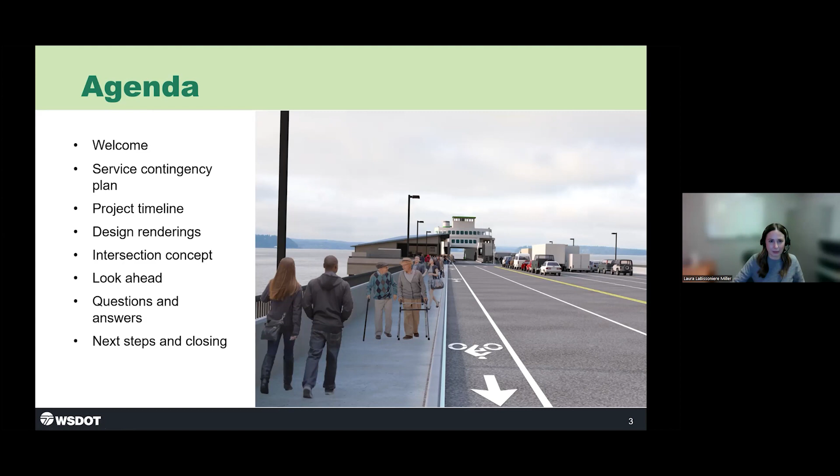Before I launch into this project timeline, just a note of something that provides a little context to this project. Last month, Washington State Ferries released its service contingency plan, which is an update of a plan we've been following since COVID that outlines some of the constraints the ferry system is facing preventing us from restoring full ferry service system-wide.

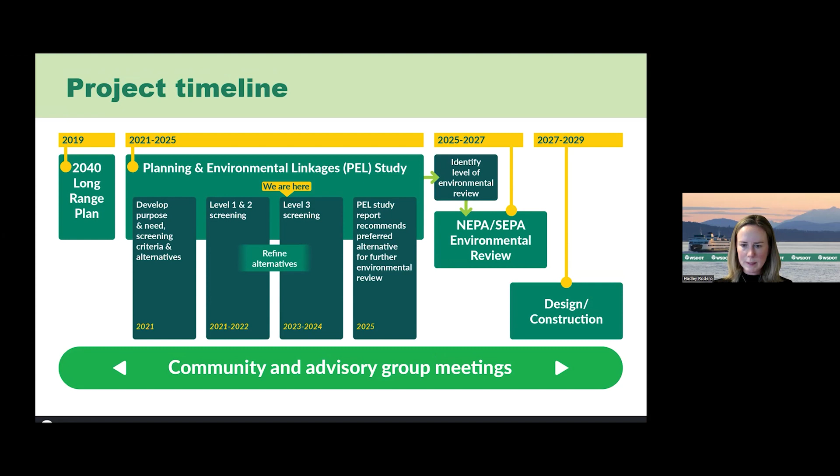One of the routes that hasn't been fully restored is the Fauntleroy Vashon Southworth route. It's been running on 2-boat service instead of the full 3-boat service for a couple of years now. The plan, which I'll put in the chat in a minute and which we released publicly, shows that we're probably not going to restore full 3-boat service in the next several years, at least full time.

We'll be adding a 3rd boat to the route as often as we have the crew and vessels available to do so. So it's just a little context for this project, that the Vashon community in particular and Southworth customers are really feeling a lot of operational constraints and have had reduced service for a couple of years, and they've been focused on working with us on how to make the best use of that 2-boat service.

And deal with the operational impacts of that, which is preventing them, understandably, from fully engaging in this project, and means we don't have a way of looking at the terminal operating as it's intended to with consistent 3 144-car ferries. So it's just something to be aware of, and you may hear from community members and constituents about this as we move forward with the process, as that's happening in the background.

But let's jump back into this project. The slide on the screen shows the timeline. We're still in the planning and environmental linkages phase of the project, the PEL study. We're in the level 3 screening process.

When we met last fall, we shared the refined set of alternatives that we're focused on right now, and we're now working through doing the analysis in several different areas that will allow us to screen that set of alternatives down to a preferred alternative that will then carry forward for further environmental review under NEPA and SEPA.

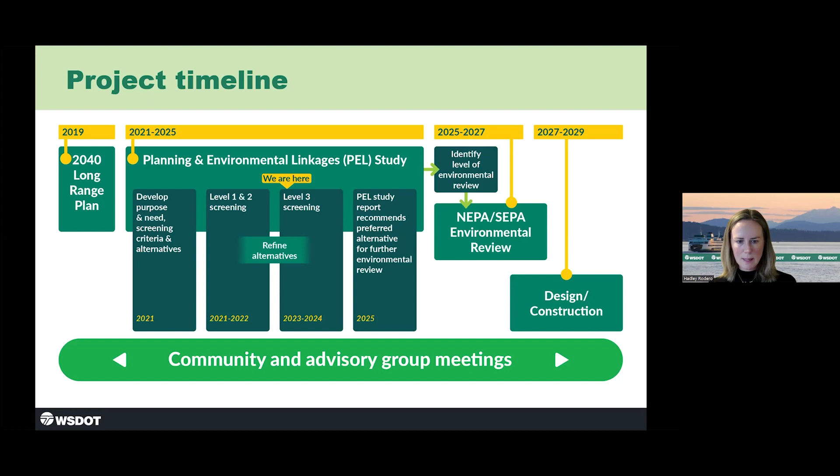This is another graphic representation of the process. We did level 1 and level 2 screening over the last several years that narrowed us into the existing dock location in Fauntleroy, with one alternative roughly the same size as the dock we have today, and alternatives that are larger than what we have today. That was the outcome of level 2 screening.

We then further refined those 2 general alternatives into a set of alternatives with different size docks and different footprints. We're at the process now where we're going to begin evaluating those refined alternatives before selecting the preferred alternative at the end of PEL. So before we move forward, any questions on the process or where we're at, or what we're looking to do today?

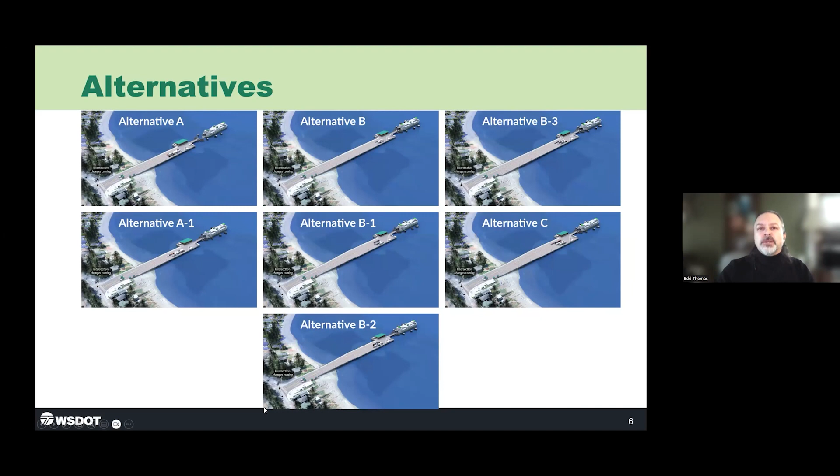So at our last meeting, we discussed the alternative summary, which sets the foundation for how we are evaluating the alternatives. I'd like to start by running through the alternatives graphics that we shared during the last meeting.

Starting with alternative A, it replaces the dock at a similar size as the current dock and maintains the existing wing walls and dolphins. This alternative has 4 holding lanes, holds 76 vehicles on the dock, and is 85 feet wide, about 18 feet wider than the existing dock.

Next are alternatives A1, A2, and A3. These are nearly the same size as alternative A, except they are approximately 40 feet longer than the existing dock and include new wing walls and dolphins. These options have 4 holding lanes, hold 84 vehicles on the dock, and are 85 feet wide.

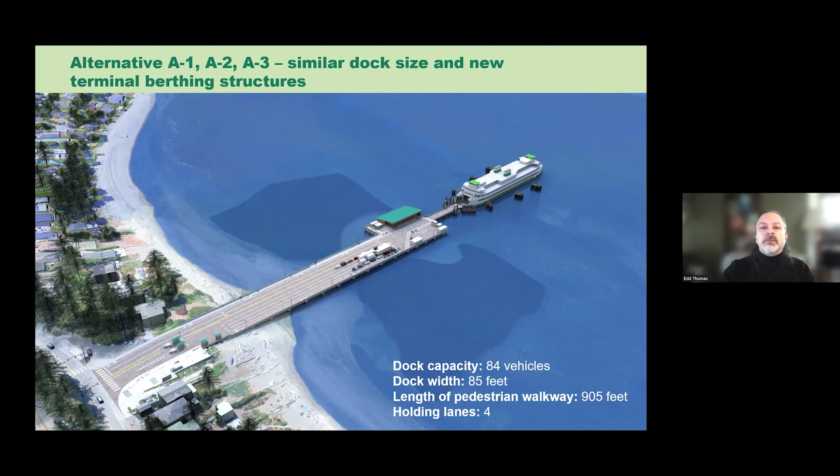Alternative B is a longer dock, and it lengthens the dock by about 240 feet more than existing. This option has 4 holding lanes, holds 124 vehicles, and is 85 feet wide also.

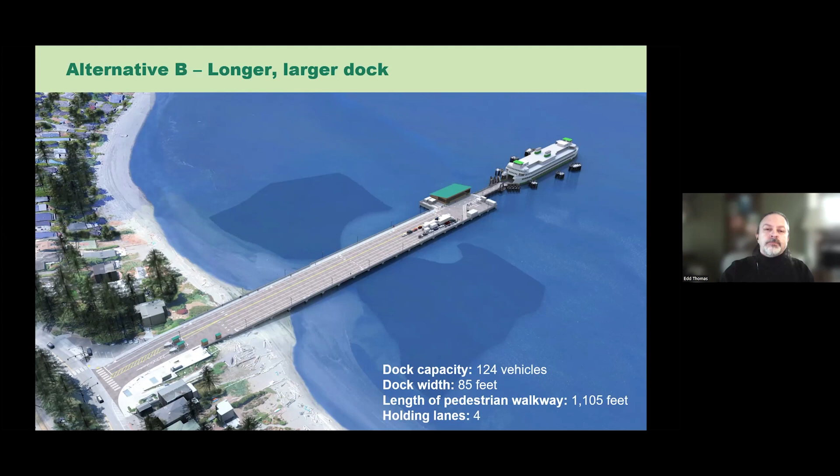Alternative B1 is also a longer dock. It's similar to alternative B, but has an added vehicle holding lane to the north. B1 holds 155 vehicles on the dock, is 94 feet wide, and this is the largest widening that we have on the north side of the dock.

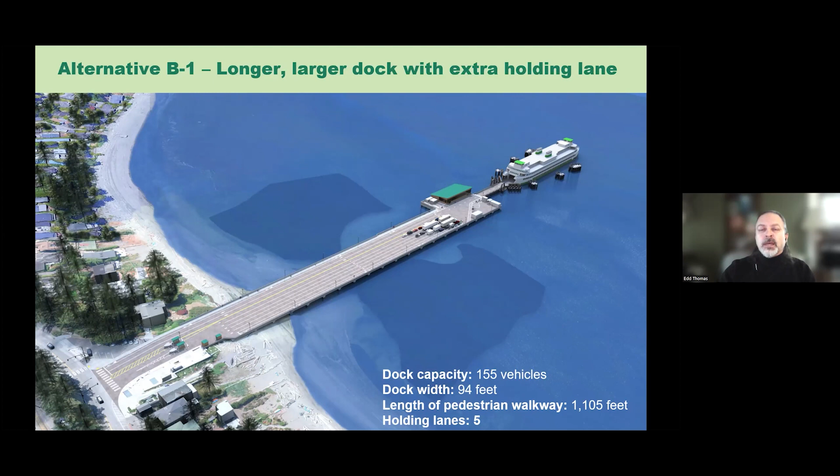Alternative B2 is approximately 250 feet longer and 36 feet wider than the existing dock. This option has 4 holding lanes and adds 2 shorter holding lanes to the south, further out over water. At its widest point, B2 is 103 feet wide, but near shore the dock narrows to 76.5 feet wide. This alternative holds 155 vehicles on the dock.

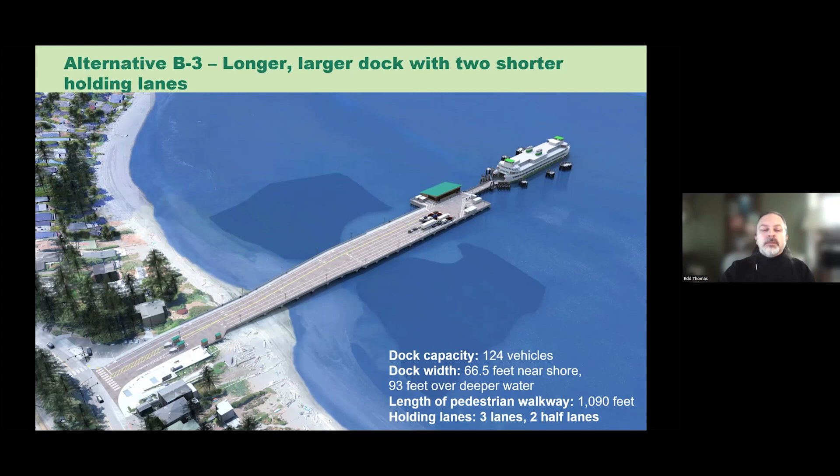Alternative B3 is the same configuration as B2, but has 1 less holding lane on the north side and is slightly shorter than B2. This option is 66.5 feet wide near the shore and 93 feet wide out over deeper water, and holds 124 vehicles on the dock.

Alternative C, again, is the same configuration as B2, but has an added holding lane on the north side. It's 240 feet longer than the existing dock. It's 85.5 feet wide near shore and 112 feet wide over deeper water, and holds 186 vehicles on the dock.

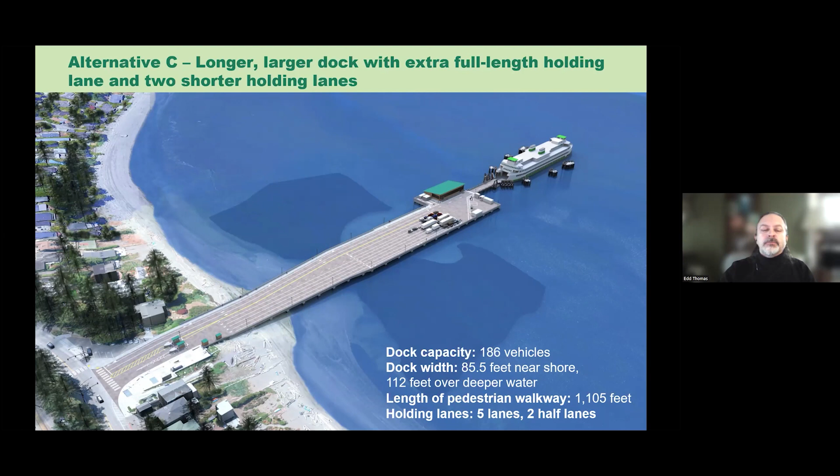Now, moving on, since our last meeting we've developed design renderings to help better visualize the differences between each alternative. These show conceptual finishes based on Washington State Ferry's new Mukilteo terminal. The intent of these renderings is to show the dock footprint and general layout for each alternative, and we will seek community input on the look and feel of the terminal later in the design process.

This first view is taken from the King County Pump Station and helps show what each dock option looks like next to Cove Park. The next three slides for A, A1, and B will show an approximate 13-foot widening to the north. Alternative B1 shows an approximate 22-foot widening to the north.

Alternative B2 shows an approximate 5-foot widening to the north. Alternative B3 is narrower, and it's actually narrower than the existing dock on the north side. Then alternative C again shows an approximate 13-foot widening to the north.

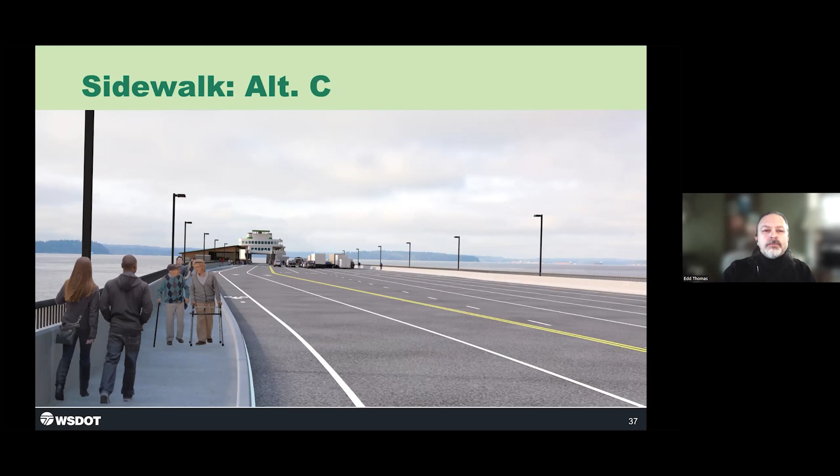Okay, this final view is from Captain's Park, and this offers a good perspective to visualize the differences between each alternative configuration. These first three, alternative A, A1, and B, are the same configuration, 4 holding lanes, and they have a dedicated motorcycle and dedicated bicycle lane. They're on the north. Alternative B1 adds the 5th holding lane there on the north side.

And then these next series show the actual partial holding lanes that are added to the south. On the north side, for the first length of trestle, you'll notice that there's a shared motorcycle bicycle lane, and out over deeper water, it widens into a dedicated separate motorcycle and bicycle lane.

Okay, with that, I'll hand it over to Laura. Thanks, Ed. Okay, just pausing to see if there are any clarifying questions about any of the graphics, if anyone has any questions or comments, and we can certainly go back as well to review any of the images that we just showed.

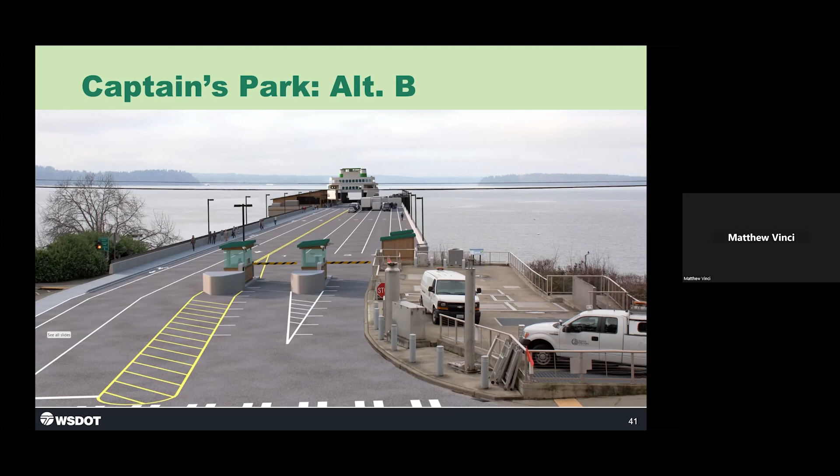Yeah, there's not really any new space for vehicles or emergency vehicles. But the priority loading WAC would still apply, so your vehicles still have priority loading status returning to the island, so they would get on the boat. How they get there, I guess, is an operational decision that we'd make, right, Trevor? How you get them down to the front.

Correct. And when they finally get close to selecting the alternative, the operations team will sit down and plan operations on each design that you guys have, to see what works best for us. Perfect, thank you very much. I appreciate it. You bet. Thank you.

Any other questions or comments before we move on to the intersection? Rod? Yeah, I'm new to this whole process and all the background to it, but I was wondering, the ferries that use this terminal, where do they berth at nighttime?

Great question, let me answer that. So we basically berth two of them. Well, right now it's a two-boat schedule, so one will berth at night over at Vashon. And because we have a crew switchover, the other one will berth at Southworth. Ideally, all three of them would berth at Vashon overnight, but right now one berths at Southworth because of the early morning crew hours.

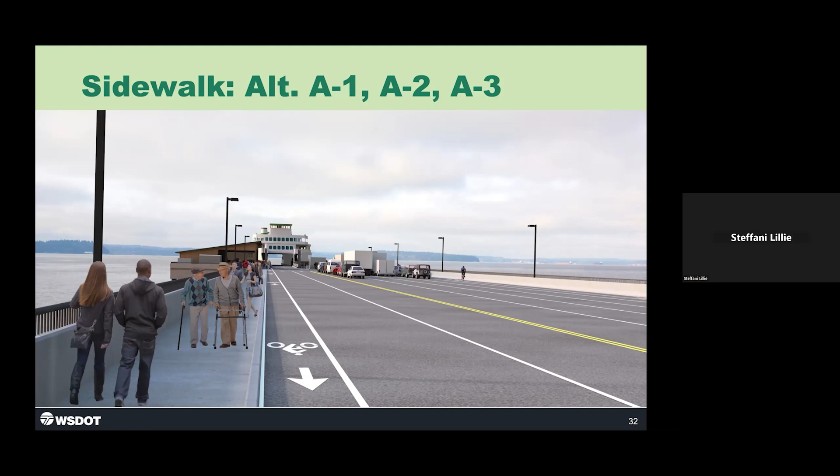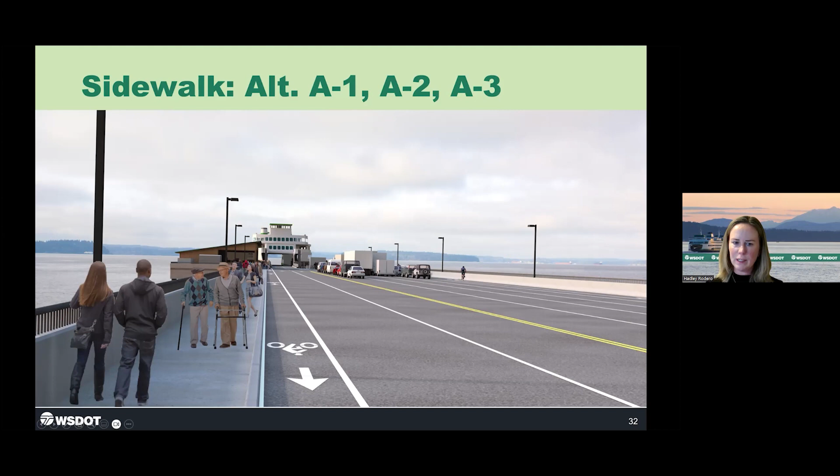No, I think that's great. The one thing I would highly recommend is maybe a portion of the way down, benches, just so that if you have somebody a little slower who needs to take breaks, you've got that built in. Yes, that's a great comment, Steffani. And back to Penny's question earlier, I forgot about this - this is another comment we've heard extensively through public outreach, that some of those docks, the B alternatives that go longer, they're concerned about the distance between the transit stop and the road and the end of the dock to get out to the terminal building, both from folks with mobility challenges, ADA perspective, but just in general.

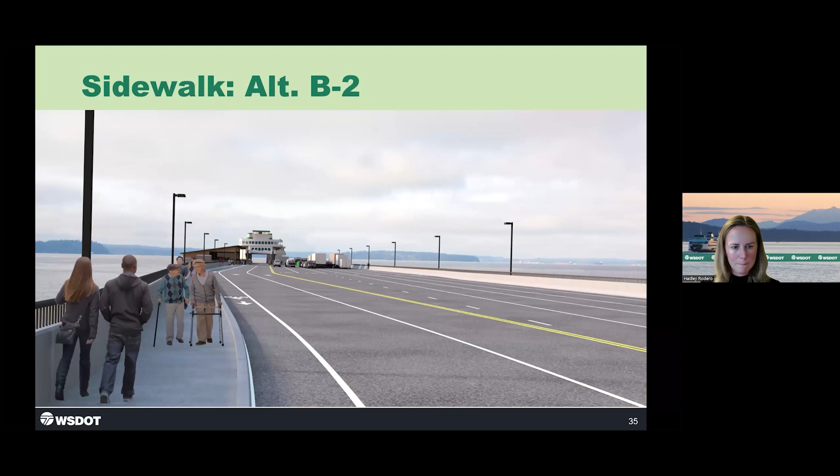Okay, I'm not seeing any other hands up, so we do have some additional time later for Q&A, but we'll go ahead and move on to the intersection. Dave, do you want to kick that off? Yeah sure, let me introduce the next part of the presentation, and that is the intersection at the head of the dock at Fauntleroy Way.

So a key part of our purpose and need statement, as we've talked about in previous meetings with you all, is just to improve our overall operational efficiency at the terminal. We've talked at length about the size of the dock being about two-thirds of the capacity of the boats. We've talked a little about pickup and drop off, staging for bikes and peds, and all of that. So within all of that, our goal is to make the terminal work more efficiently. One of the things we're looking at right now is how we could manage the intersection better, especially now that we've announced the Triangle Route will be on two-boat service for at least the next few years, if not longer.

In order for us to maintain our headways and process the vehicles off the boat, and as well to address the safety concerns that I think have been out there for many years, long before this project showed up, the idea of signalizing the intersection is taking root.

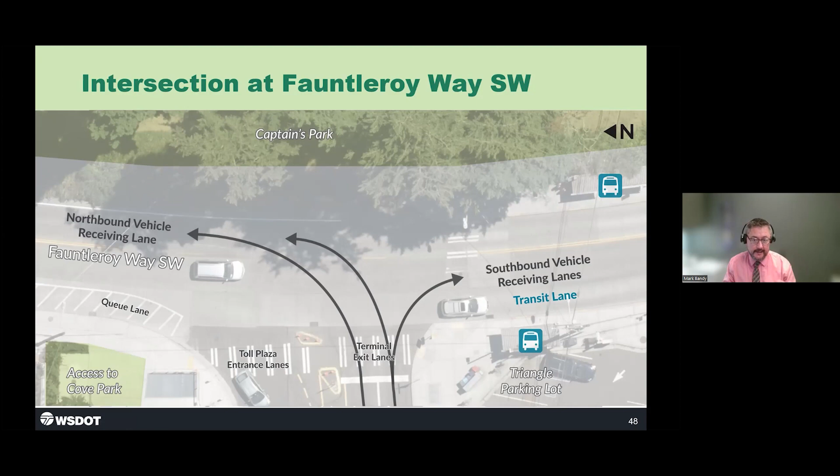Back to the conceptualized signal. What we're showing here is how the movements would come off the dock in the two black lines: left lane going left to go northbound, and the right lane going right to go southbound. We're also showing how the bike lane and pedestrian crossing movements would occur. Those we're thinking would be in their own phase to separate them from the vehicle movements coming off the terminal. And then Fauntleroy Way, of course, would be served as it is today.

Patterns to go to the ferry would be very similar to the situation today, where it's predominantly southbound on Fauntleroy Way during the busier times. The northbound left turn would be prohibited. In the case of a signal, we could do that with an electronic sign that can be turned on or off for lower volume times when that restriction doesn't need to be there.

A couple of features of the signal: we'd design it to have emergency vehicle preemption response, also support transit signal priority since the C Line runs along Fauntleroy Way here. And we'd also design it to have detection that can monitor when the ferry is arriving or not arriving, so you can time the signal to handle the different volumes that come off.

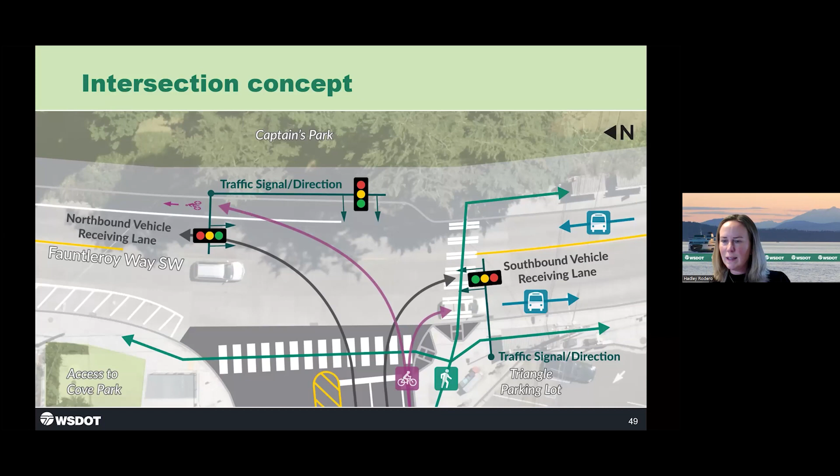Absolutely. I mean, we have a lot of questions for you too. So if you have questions for us, please shoot them over. We can't answer that because we're not in operations, but we can certainly find the right folks to answer those questions.

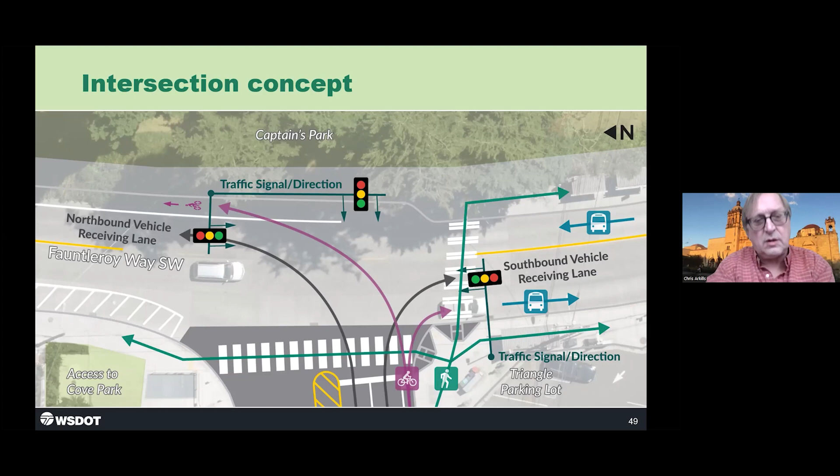From my personal observations, by the time the pedestrians got up to the two crosswalks, there were enough pedestrians that he prioritized letting them move, therefore stopping the cars, which allowed the bus to pass. So the bus was usually waiting there for like a minute or two while cars were actively unloading. But once those pedestrians got there, he was able to allow the bus to go by because they weren't interfering with that movement. So it's probably a mix, and it probably depends on the quality of the signaler and all kinds of things.

Okay, thank you. Just looking to see if we have any other questions. Mark, Chris mentioned TSP. Can you talk a little bit more about how you'd envision TSP working here?

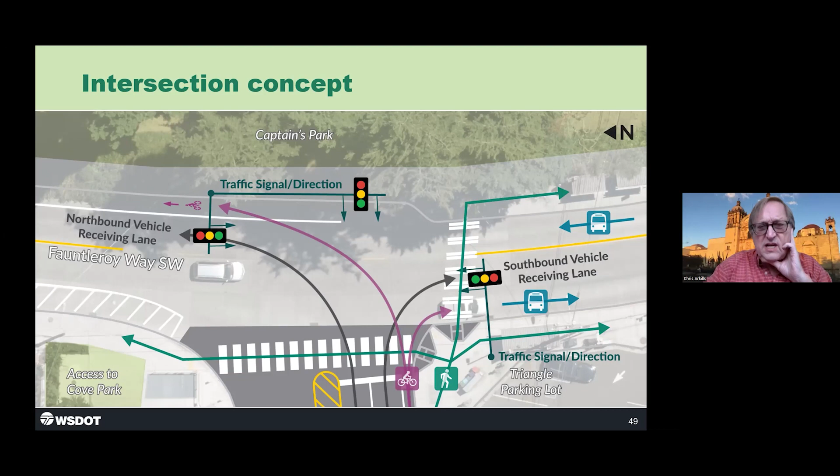Sure, Chris. I think what I was speaking to is basically designing for it to be connected and adaptable to TSP, but there's more details to come. I think, for some of the reasons you just talked about, does a bus hold or not? From the southbound direction here, essentially, the city and Metro are working together in terms of agency to agency transit signal priority, almost at a system level, as we think of it. So it would basically be making sure the infrastructure here is designed to enable that connectivity to happen, just like it does at a majority of other intersections throughout the city.

So that's the idea, and there's a lot of different treatments that come under that capability. For example, you can think about extending or holding a green on Fauntleroy northbound if the bus is near the bus stop, or has just stopped, and then you want to hold it so it advances through. That's an example that might be considered here. It does relate to the topic just discussed about waiting for passengers or not if you see them, so there's always a complexity of thinking that issue through. But that would be what, as Steve said, we'd be talking about in the next phase, what does that look like, what are the operational aspects, and is it all the time or some of the time? Because again, that pattern varies.

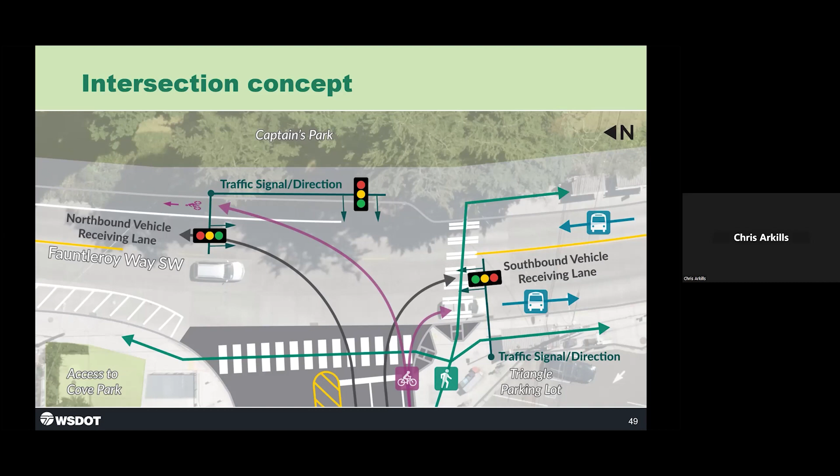Thanks, that help, Chris? Yeah, I'm just trying to understand things. Yeah, I mean, if people don't know this, it's actually a good thing happening at the system level, meaning King County Metro knowing where its fleet is and the city having connectivity to all the different signals. That's a better way for this to happen than some of the 15, 20, 30 years ago priority treatments, where it was on an intersection basis and you couldn't see the extent of the system.

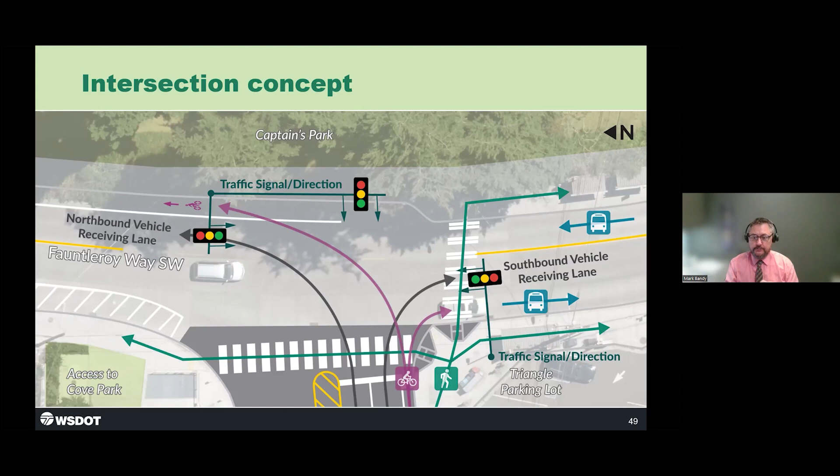Okay, thanks, Mark. Certainly coordination with Metro will be key on our list as this concept moves forward in design. More conversations to come. We just have a couple more slides here, and then we might be able to get you all out a bit early.

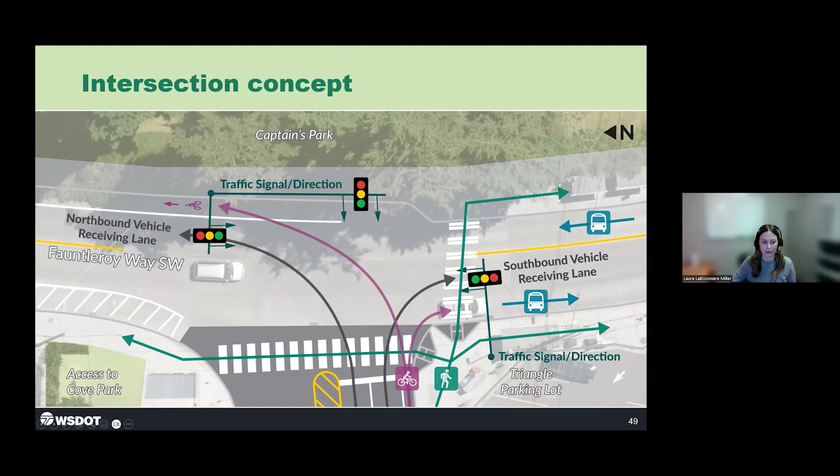So before we wrap up today's meeting, we just wanted to share a quick look ahead on what else our team is working on to get us to that next milestone of completing the level 3 screening and selecting a preferred alternative. And Mark is going to tell us a little bit more about the traffic analysis work.

Sure, thanks, Laura. So we know that lots of people are interested in seeing traffic analysis and how that relates to the operational efficiencies and differences with different dock sizes, as well as advanced ticketing concepts, the application of Good To Go. So we've been working on developing a traffic model that represents the interaction of ferry traffic arriving, the loading of a vessel with the unloading process, and then what that looks like for different dock sizes in terms of the time to process, as well as the extent of queuing differences that would be out on Fauntleroy Way. We've been working on calibrating and understanding a variety of the inputs into that, from vessel capacity, typical processing times at the booth.

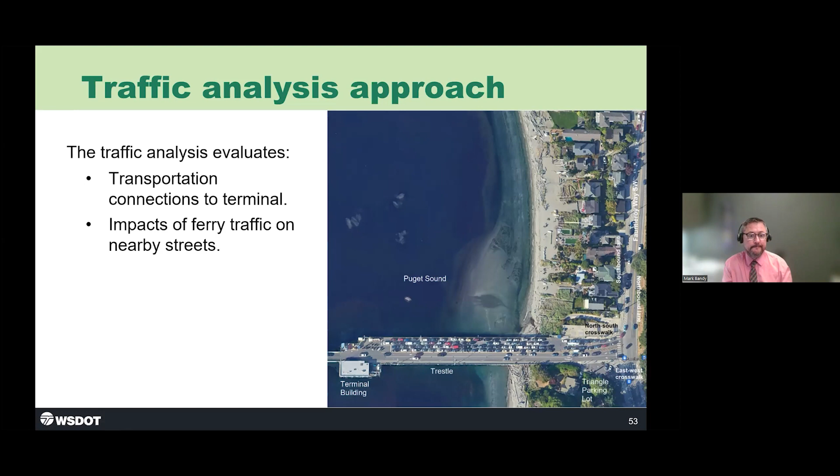The frequency or time between load and unload, and that dwell between routes - all those things are being fed into the development of that traffic model. And so coming up, both with the CAG and then the TAG, this group will be showing those results that will help support the evaluation criteria related to those operational efficiency criteria. And with that, I'm going to hand it to Marcia.

Thanks, Mark. So he's given you an overview of the traffic analysis. We're also evaluating environmental considerations to complete level 3 screening. This includes reviewing overwater coverage and in-water aspects of the proposed alternatives, as well as the number of piles. We're looking at how each dock alternative could impact environmentally sensitive areas, including fish and eelgrass habitat. So we'll review those findings from this analysis at our next meeting before we complete level 3 screening. I'll pass it back to Laura.

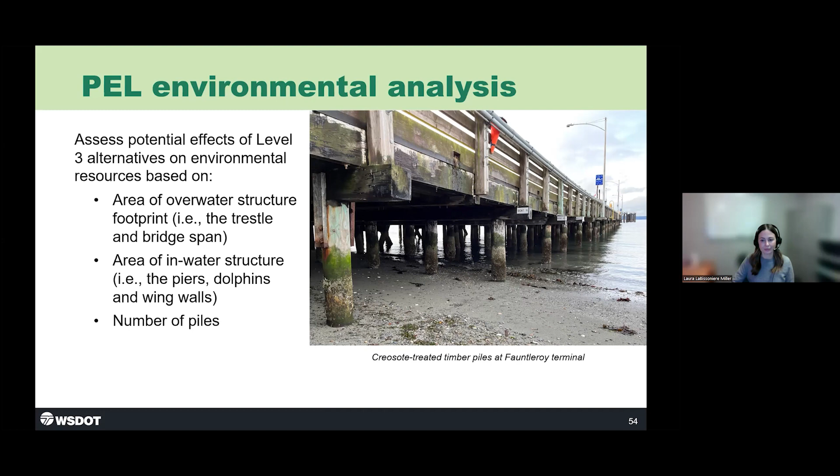Okay, that wraps up our meeting. Are there any other final questions about any of this upcoming work or anything else we discussed today? Penny?

I was looking at the materials you sent ahead of time, which included the presentation, and there is a level 3 criteria table right there at the end with the colors for ranking. Do you want any feedback on that after this meeting, just as we go through them and email the group - the thing that my brain is not thinking of, but is there an email thing for the group where you provide for us to do comments?

Penny, the attachment I sent yesterday is what we were considering the final version of the document we shared at the last meeting in October and discussed and have received some feedback on, but we're obviously more than open to additional comments or feedback you have on it. It was the alternatives memo, I think is what you're referring to.

Yeah, and I just didn't know if you wanted any additional feedback. It has the graphics and everything, and there was the criteria at the end. So that's all. Yes, we'd love any additional feedback because we're moving toward, as Marcia just mentioned, we're working on all of this analysis that's then eventually going to feed into informing that screening criteria, doing the screening. So any feedback on the criteria itself would be super helpful at this point, or anything else in that memo. Okay, great. Thank you. Thanks, Penny.